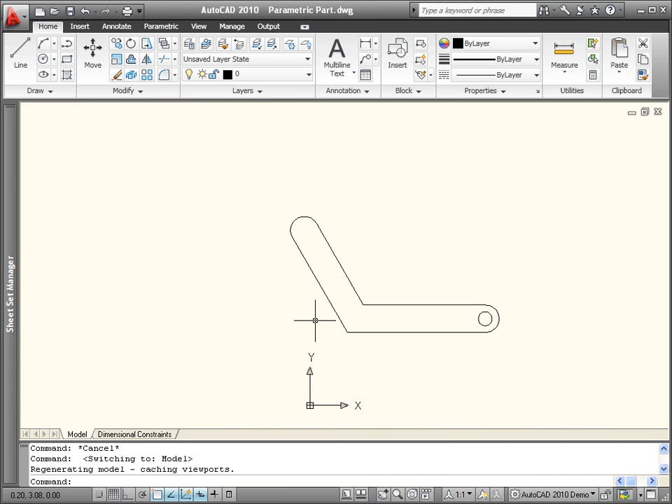Dimensional constraints in AutoCAD 2010 enable you to create and maintain dimensional relationships among drawing geometry. You can add dimensional constraints similar to adding typical AutoCAD dimensions. For example, I'll add two aligned dimensional constraints for the length of the arms and an angular dimensional constraint to specify the angle between the arms.

I'll add a diameter constraint for the circle and a radial constraint for the arc. The dimensional constraints are displayed with default names such as D1, D2, or Rad1, Rad2, but you can provide more meaningful names as you create the dimensional constraints or at any time.

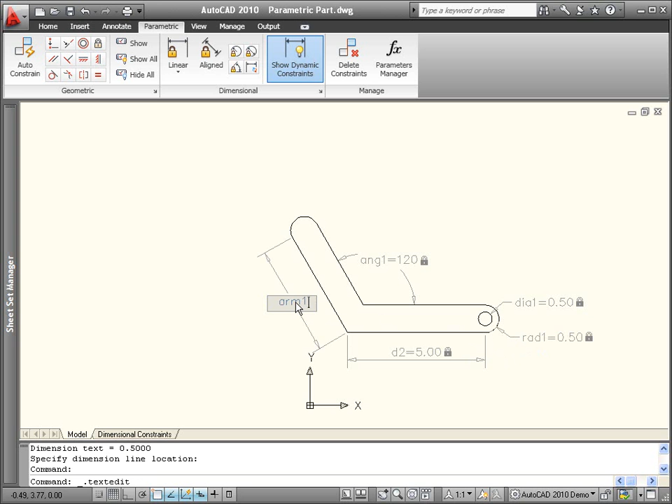View and modify the dimensional parameters in place or using the Parameters Manager. For example, I'll rename D2 to Arm2 and DIA1 to Bolt Hole. In the Parameters Manager, you can even create your own user parameters. I'll create two user parameters, one that defines the bolt diameter and the other to define the rod diameter.

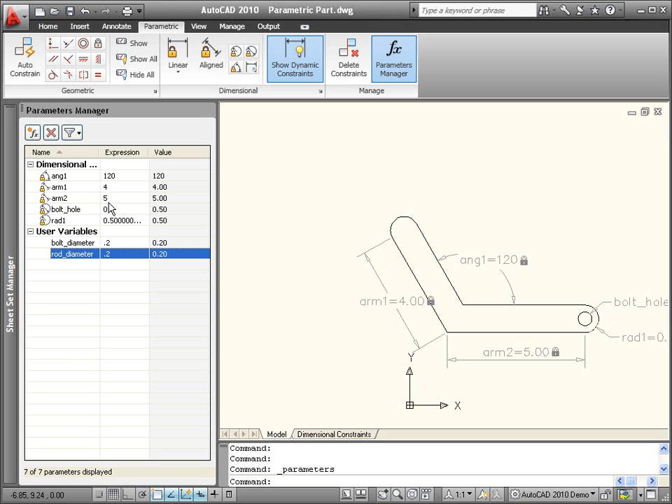Easily modify the parameter expressions by entering numeric values or formulas, which can reference other parameters. For example, I want the length of arm 2 to equal 1.5 times the length of arm 1. The bolt hole diameter dimension should be equal to my user-defined bolt diameter, and I want this radial dimensional constraint to equal the bolt hole plus 0.25.

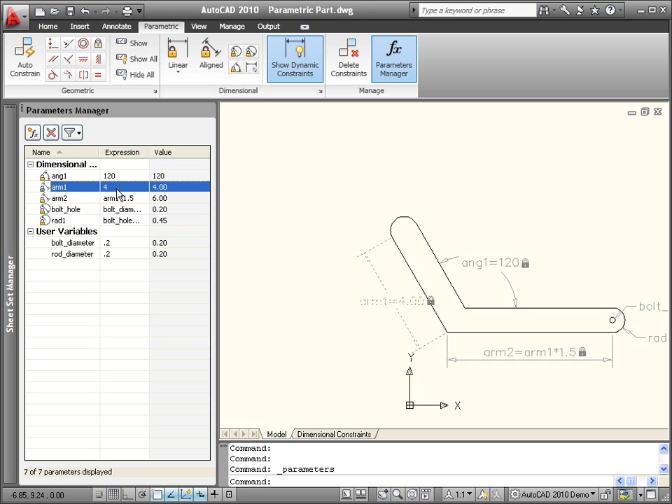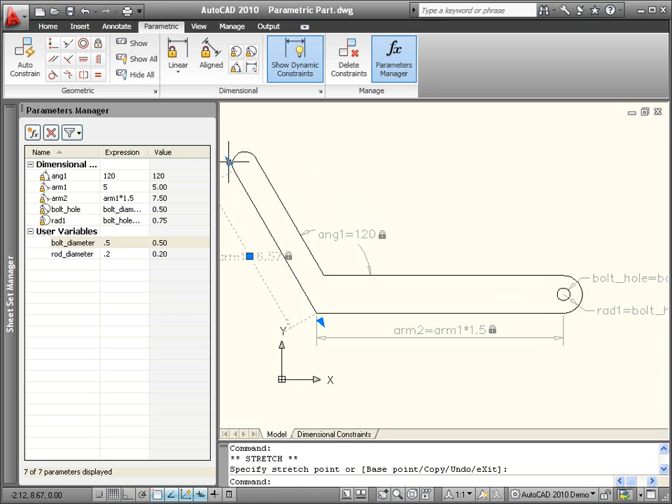Now when I change values, such as the length of arm 1 or the diameter of the bolt hole, the rest of the part automatically updates to reflect the changes. The new dimensional constraint names and their expressions are automatically updated in the drawing editor. The dimensional parameters that are not dependent on other parameters can be easily edited with grips driving the geometry that depends on their values.

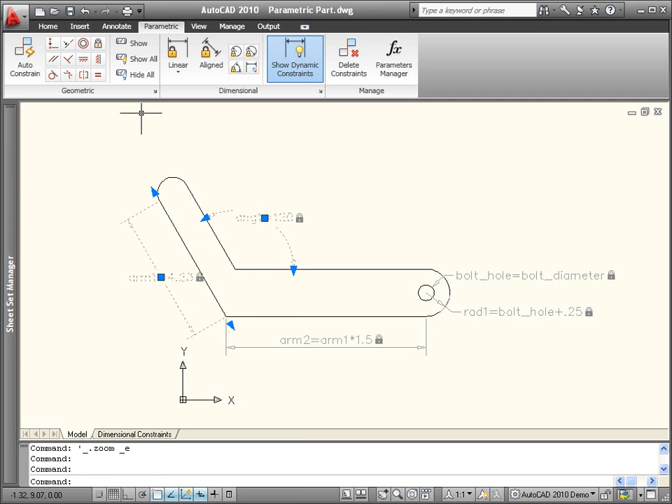By default, dimensional constraints dynamically resize for display purposes. As you zoom in and out of the drawing, the size of the dimensional constraints remains consistent, and they are not included when you plot. If you want some or all of the dimensional constraints to display and plot similar to traditional dimensions, you can change the constraint form object property of selected dimensional constraints to annotational instead of dynamic.

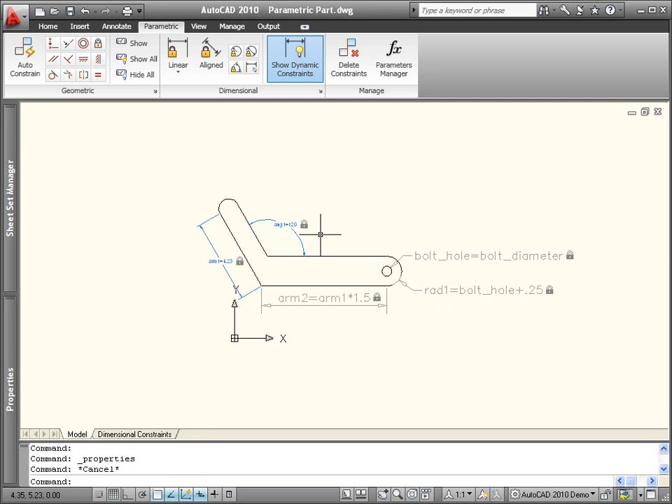You can then control their appearance with layers, dimension styles, and other traditional tools while benefiting from the power of parametric dimensions. Since dynamic constraints maintain their size for display purposes, they can cause the drawing to appear crowded. You can easily hide dynamic constraints, yet have them display automatically for selected objects.

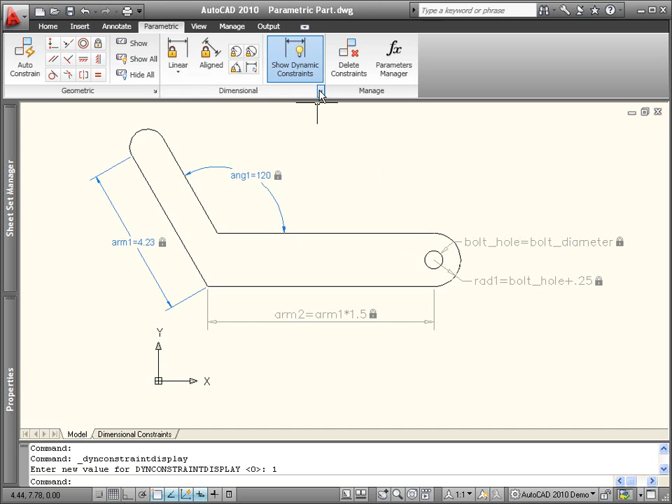Whether you create dimensional constraints as dynamic or annotational, you can control their display format to meet your needs. In the Constraint Settings dialog box, you can choose to show the name, the value, or the name and expression.